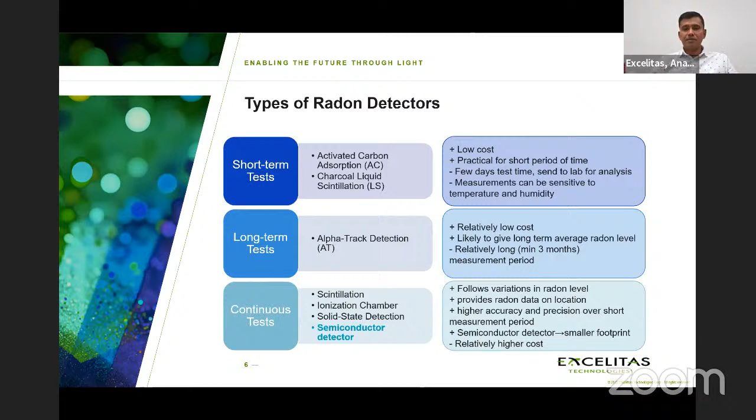The main importance is that continuous monitoring gives you information right then and there, so you know the trend over time and can take appropriate action. This is where the semiconductor detector comes into play. There are many types of continuous detectors, but semiconductor detectors are much more practical and easier to use—basically a pin photodiode, which is what I'll be talking about today.

What are the key requirements for good radon detection at low radon concentration, since you want to measure at low radiation levels? Like I mentioned, these usually need a long measurement time and a larger detector area—whatever the detection method, you need a larger area to absorb the alpha particles and do the detection. Also, how the setup is done, the collection setup or channel volume, all influences the measurement.

These are the key parameters, and silicon photodiodes typically cover all of them nicely, particularly for long measurement time. A pin photodiode can be used for continuous measurement, so you're looking at the trend over time, giving a better indication of how it changes. Silicon pin diodes are suitable for radiation detection, especially alpha particles, because they can detect at the surface—important for radon detection—and they have good energy resolution and good absorption depth for greater absorption.

Continuous measurement and ease of use are key. You can just bias the detector, and with a simple amplification circuit, you can make a good, nice radon detector. It's also more compact and lower cost compared to other continuous measurement methods.

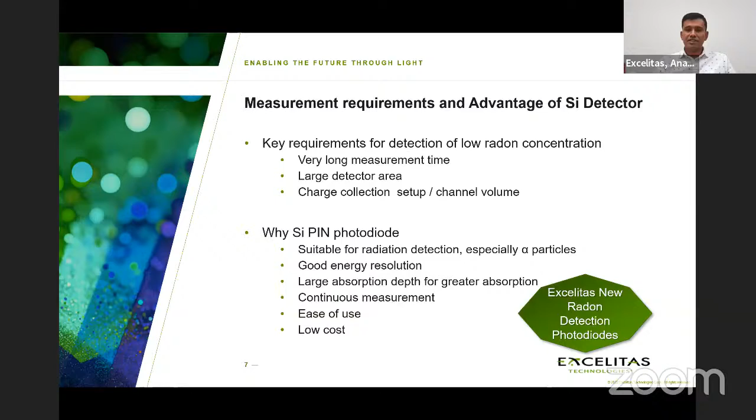With that, Excelitas is introducing a new series of photodetectors specifically suited for radon detection. The product is called the VTH21 series photodiodes. There are 2 different detector sizes we're launching now, 5x5 and 10x10, usually large enough for alpha particle detection for radon.

This can detect alpha particles directly—these are bare die photodiodes, not enclosed in any housing. That's what you need, because you want the alpha particles to hit directly on the surface of the silicon, which converts it into a signal that's then processed.

A large area, as I mentioned, is good—it increases the detection probability, with a wide operating voltage range. You can bias them at a higher voltage to reduce the capacitance, meaning you can detect much faster, and it also has a lower dark current.

These are unsealed detectors, so you need the design to be highly reliable even when operating in an unsealed environment. This has been designed with that in mind.

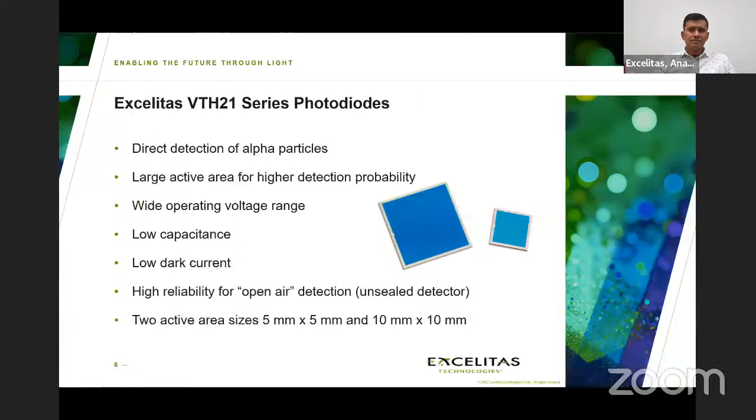We are excited to launch this product and hope it will serve a lot of homes to detect radon and provide early detection to improve everybody's life in the end.

Thank you very much, Anand. This is very exciting to see this kind of product. I was wondering, how compact can it be together with the packaging and the battery and everything? Can it become a wearable device?

It cannot become a wearable device because you need a kind of chamber. These are usually like a smoke detector that you would mount in a house. Typically they're mounted in the basement of the house because that's where the main source is, so that's where you want to detect. That's the typical assembly and mounting location for the device.

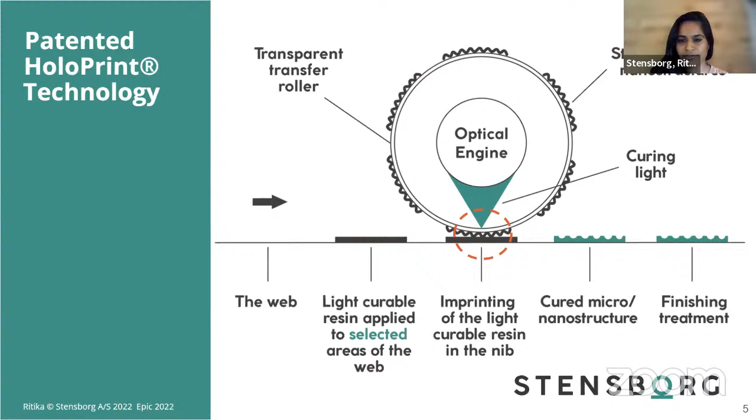So what's new with this machine in 2022? Well, the machine has been enhanced and improved with different things. First of all, the optical engine — the optimized UV light source — has even better optics now. Then there's better compensation for different substrate thicknesses. We've improved the design for several mechanical parts, and the plate motion has been upgraded so that we can do really low-speed operations.

And what does this all mean? The machine has become even more versatile — when you have really low-speed operations, you can cure even really hard resins. So these are some of the highlights of the machine.

And what can the machine do? Here are some things we've done with the machine. You can see a really complicated four-level DOE beam splitter that has been replicated with high accuracy using our machine. There's also this hydrophobic surface, which is a microstructure — a big structure with holes in different materials. And we can also do really high aspect ratio patterning with this machine.

So the machine is multifunctional. It can be used for nanoimprint lithography on hard and flexible substrates. It could be used for fabrication of templates, and it can also do processes like reverse nanoimprint lithography. With this multifunctionality, the applications span a really broad spectrum.

From photonics and optics to even life sciences — you can imagine you can imprint on the substrate, and that substrate becomes the device, for example for a DOE. Or you can imprint the surface of the substrate, making it a functional substrate, which you can then use as an etching mask or something like that.

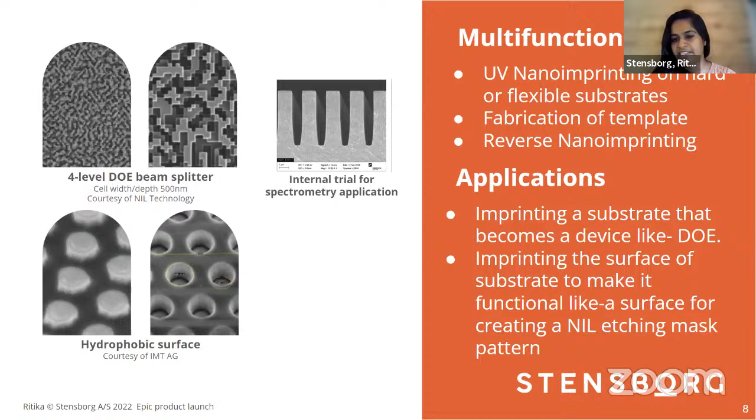So that was it from my side, and thanks for listening.

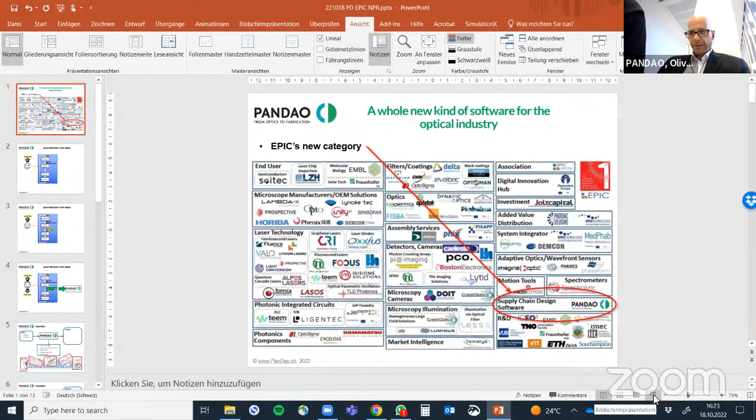Please, Okay Oliver, can you see my screen? Yes. Just make it full screen. Hello? Yeah, just make it full screen. Yeah, sure, okay.

I'm Oliver Faehnle from a company called PanDao, and my last name is quite complicated, sorry for that. We are a software company and part of Epic, and Epic generated for us, when we became a member, a whole new category: supply chain design software. So I will explain what this is, and then very shortly explain our new product, which we will release next week.

We all deal with optics. Optics needs to be designed, optical systems, to serve a certain application. While you design optics, you need an optics designer, like this guy here. And he is very nicely helped by optical design software tools like Zemax, Code V, OSLO, and so on, to design the optical system needed for the application.

But the next step in the generation of the optical system is the fabrication. And this interface from design to fabrication is exactly where PanDao moves in, because today this is still based on human-to-human interactions. You need to talk to each other and ask, can you fabricate this design? How much will it cost? How big is the danger, or how low is the risk? And that's where we move in.

We developed, that's our standard product, a software tool that reads the optics design and simulates an optimized fabrication chain. It helps you to know the cost of your optics when it will be produced and the risk you have if you want to have it produced. So basically it makes the optics designer more happy.

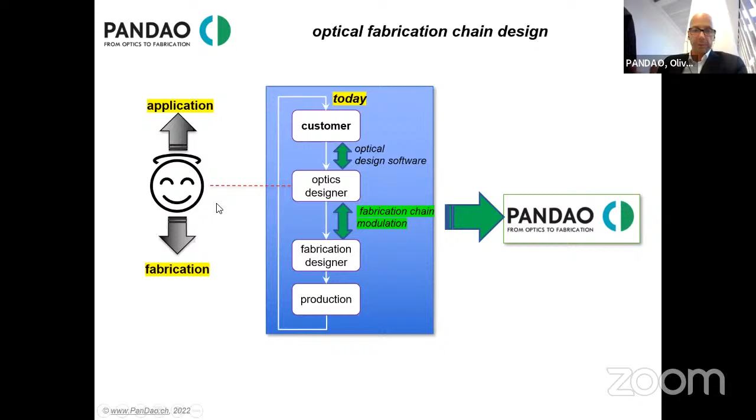How do we do this? We read in, due to ISO standard 10110, optical drawings, and we need to know how many lenses you want to produce. Then PanDao harvests among 360 different technologies available to produce optics, ranging from diamond turning to ion beam figuring to magnetorheological finishing and so on, all 360 possible techniques, and makes them compete with each other to be allowed into the best fabrication chain for this piece of optic.

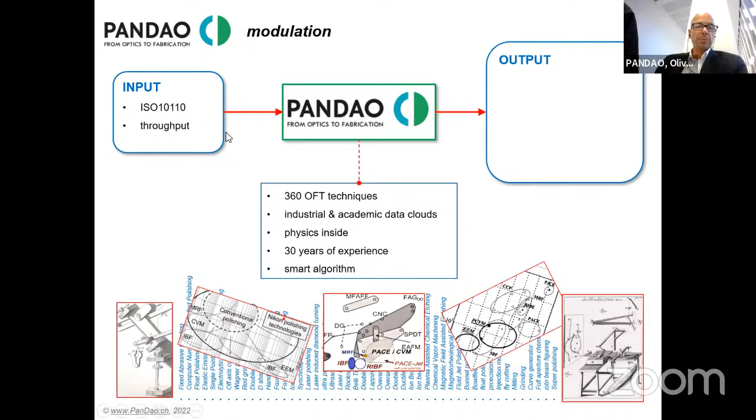So the output of PanDao software, that's our standard, is the most cost-efficient fabrication chain. On top of that, we also give the fastest fabrication chain, because sometimes you have to deliver next week, and then you are happy that you can deliver, although it might be a little bit more expensive. What can you do with that? Well, here is a lens that you read in. It's an asphere made of glass, and it's just a short glimpse so you know what I'm talking about.

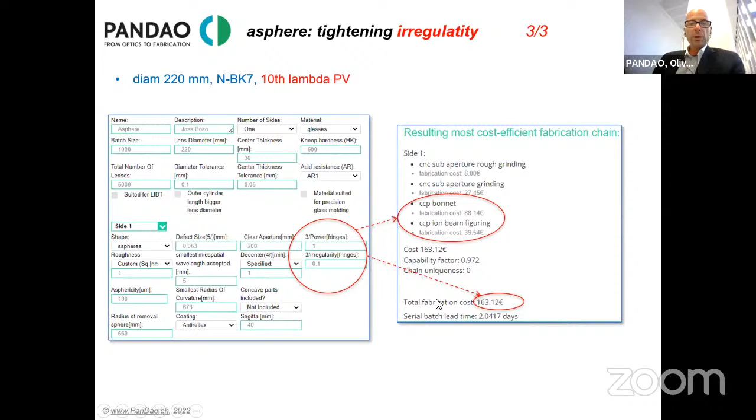If you now change the shape accuracy during design, you can check what the impact is on fabrication. Like you go from 2 lambda to 5th lambda, and then you see different technologies move in and the price changes as well. Or you go to a 10th lambda, then again technologies change and the price changes again. This is what you can do with PanDao, and this is the standard we harvest among these technologies, and we give you the best fabrication chain.

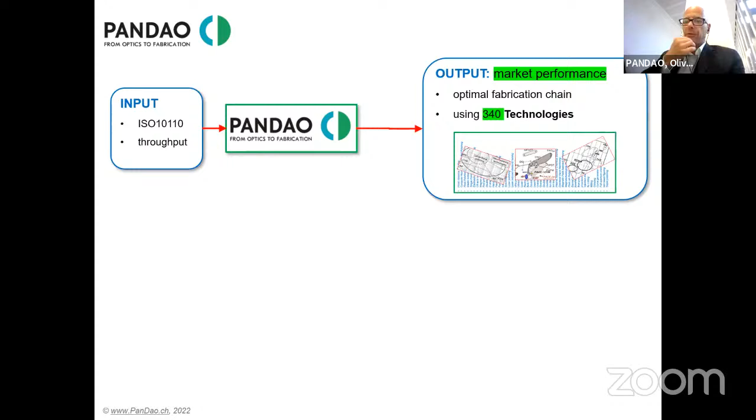So what is our new product, which we will release after this meeting? This is another kind of software, PanDao, and this reads in, NDA protected, the fabrication technologies you have. If you are a fabrication company, optics fabrication company, you don't have those 340 different technologies available. You have some of these.

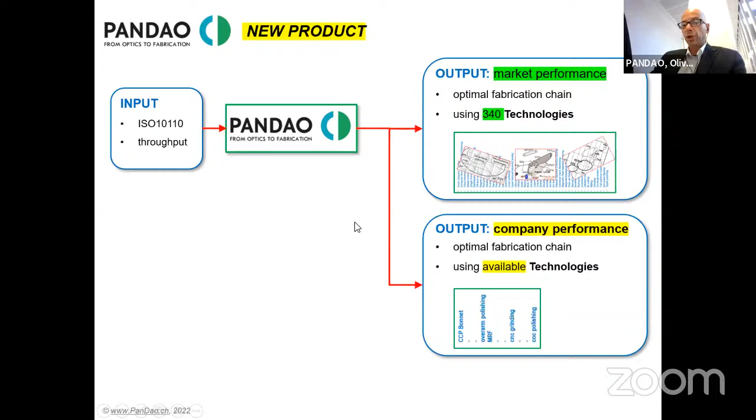Of course you are interested in having the best results possible on the market, but first of all your CEO is interested whether you can do it with your own technologies available. So we read in your technologies, which are of course not the amount available out in the market, and then you get the best fabrication chain based on your own available fabrication technologies, and can compare that with the best fabrication chain if you would change and go to a supplier, or if you invest in something.

So what is your gain? Your gain is you can determine the delta of your best fabrication chain for this optics to the best fabrication chain available in the market. So either you can prove, hey, we are better than the market, or you see we are more expensive, so let's invest in a new technology to stay competitive.

The second thing is you can evaluate your own or your supplier's fabrication chain. You ask your supplier, okay, you want to produce our optics, so what do you have available? And then they tell you what kind of technologies they have. Then you check what this will be costing if they do your optics, and you can compare that again with the market available. So this helps to save risk and money.

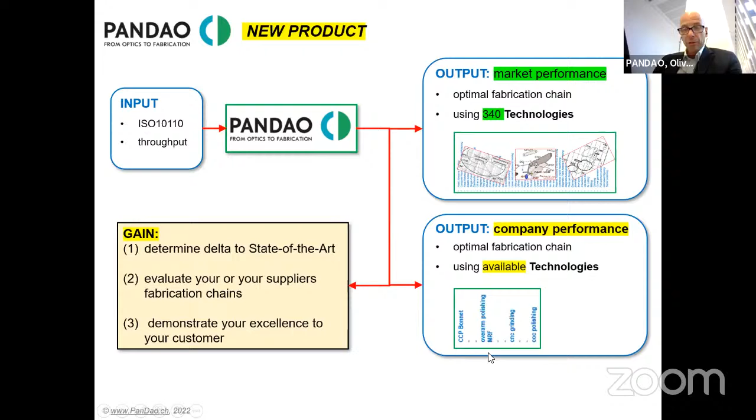And the last one is, of course, if you have a fabrication booth, you're really good, and then you can prove to your own company or to your customers your excellence. You can show that your own fabrication chain is optimized for your product. So look, you don't need to check for other suppliers, you already found the best one. So that is our new product. We call that the company performance software addition to our standard PanDao software solution.

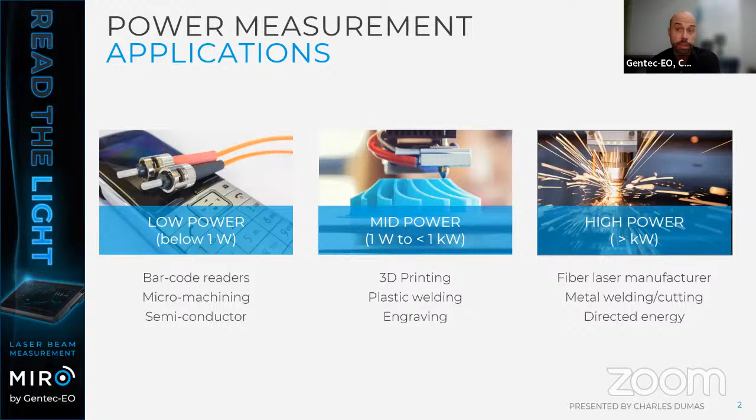I just want to cover what the Miro is and its application first. The application is basically that you want to measure the output power of your laser, which could be from low power to mid power to higher power. The Miro Altitude is the display that will work across that whole range, and it's the main choice you can have for this. The same applies for energy measurement, from low energy applications like LIDAR, telecom, spectroscopy, to medical applications, material processing, or high energy applications like nuclear fusion, physics, IPL, and more. This display will work with all detector heads that measure the output of your laser.

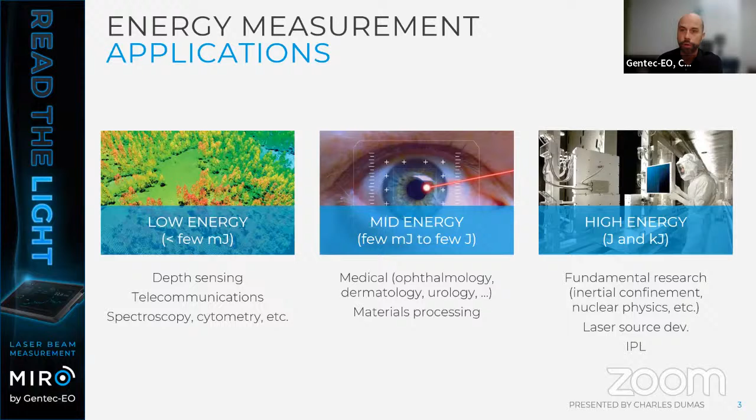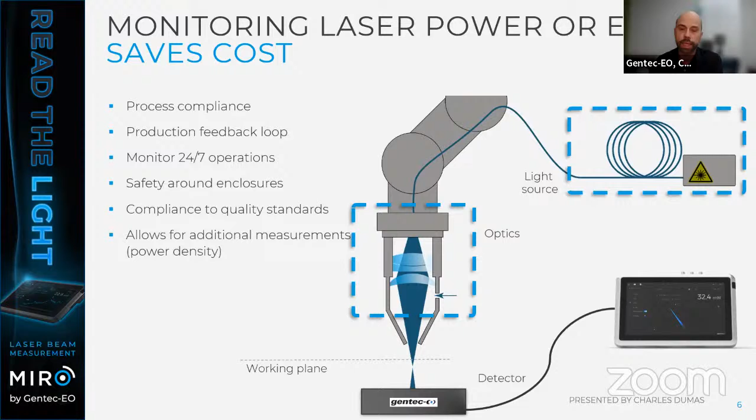What we want to give you is the easiest to use interface, for the most hassle-free experience possible. Because what you want to know is the output of your laser system, and you don't want any kind of trouble between the test measurement and the accurate measurement.

So here it is, the new Miro Altitude. It gives you 3 display modes: scope chart, needle chart, bar chart, direct access to all the parameters, and the possibility to get full statistics and reports. Inside, it has a powerful software running on a modern quad-core processor, with lots of space and memory to save the data.

The trend right now is to go with a bigger screen. In cars, the screen is getting bigger; in high-end phones, it's bigger too. The same logic applies with the Miro Altitude. Everything is encased in a very strong aluminum machined body, and you can feel it when you hold it. It's the kind of item that if you do a drop test, it will break the floor, not the device itself. It's slim, with a very high resolution multi-touch screen that is also anti-glare and anti-fingerprint glass, making it ready to use in a lab with safety goggles on.

It is able to read all the detectors from Gentec-EO that have a smart connector DB15. You can read our whole family of power meters, photodiodes, low power detectors, and energy meters. Basically all the detectors that can connect to the Miro.

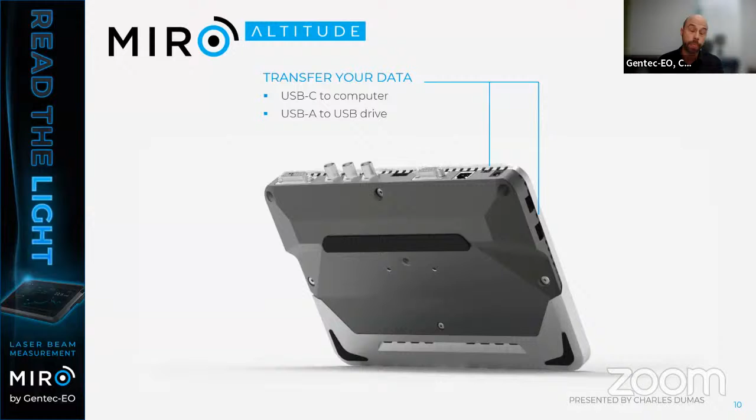We didn't spare any expenses on the battery size. We put a big one that gives you the possibility to run the test for 6 hours at full brightness.

It also comes with different ways that you can recharge it. It's compatible with USB-C or a barrel jack, and of course we provide a power supply with it, but you don't have to always use the one that comes with it. You can share it with different colleagues, and they can use their own power supply to recharge it if required.

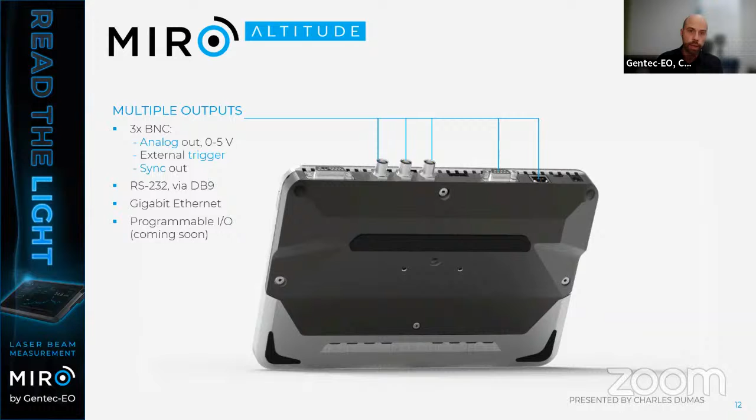Different outputs are available: three BNC, analog output if you want to work with a different one, RS232 with a real DB9 connector, and gigabit Ethernet is available. Programmable I/O will be available for logic system programmable alarms if you want to automate your system. It has wireless capability under the hood, not available at this time, but it will come at some point when things are ready.

What we wanted to show here is basically it's got the most intuitive user interface. You don't want to read the user manual, and nobody wants to open that kind of document, but you're not going to need it, everything is there up front.

There's a navigation bar where you can take screenshots and do acquisitions from the top. On the measurement settings panel at the left, you'll see all the parameters you're able to select, without needing to go into a deeper menu to change any of them. On the right, you'll see a scope that is very quick, and you can adjust it after with your touch screen.

Other measurement modes are available, such as a needle display that you can use for optical alignment, and they're very quick, much faster than a physical one, since they don't have to scale up or change when they jump between different ranges.

On playback, you can reopen a file that's been acquired earlier and it will replay the same file. You'll see statistics available from the center of the screen, like minimum energy or power, average power, what you did measure, and you can rename the file. So there are a lot of things you can do for reporting, for service, for burn-in tests, things like that.

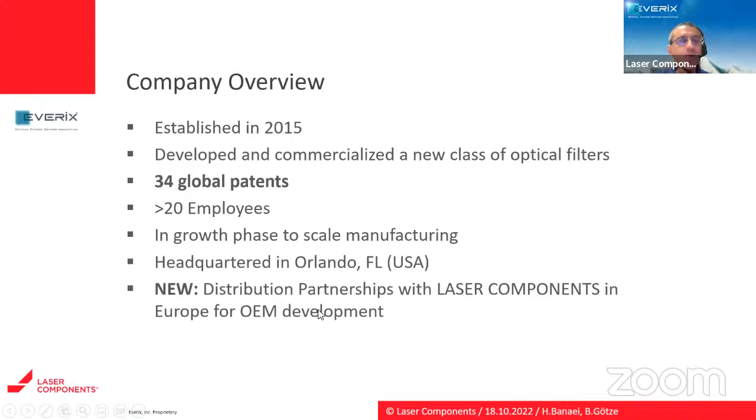Just a little bit about us as a company. We're a relatively young company, started in 2015 after a few years of R&D and development. We've now been offering our new form of optical filters for a few years, and we've developed some 34 patents around our core processes, products, equipment, and everything around this new class of optical filters. We're now in our growth phase, getting ISO certified and starting our journey into volume business, while to this point we've been primarily for small and medium-sized business. We're very excited that we've recently started a partnership with Laser Components as our OEM, development, and distribution partners in Europe. So with that, let's talk about the technology.

We're all familiar with vacuum coating and how traditional optical filters are made, and this is how the products look. So what we are adding here to the industry, as a complementary solution, is a new way of making optical filters, because there are many segments of the market that require a different level of scalability and economies of scale, allowing these high performance optical filters to get into much larger mass markets.

And that's where our thermal drawing process comes in, a process that is more similar to how optical fibers have been made. In fibers, you start with a large cylindrical preform, you draw it down to fibers. In our technology, we start with a multi-layer slab at a really large scale, and then we shrink that entire stack.

We pull the entire stack of layers down to the nanoscale sub-wavelength regime. As a result of that process, we offer really good scalability, and the product comes out at least some 20 times thinner than traditional optical filters as a standalone component. This helps a lot of our customers increase signal to noise ratio in their sensors, for example. In many cases, our customers want to miniaturize the device - let's say if it's a wearable device, you absolutely want everything to be very compact and lightweight.

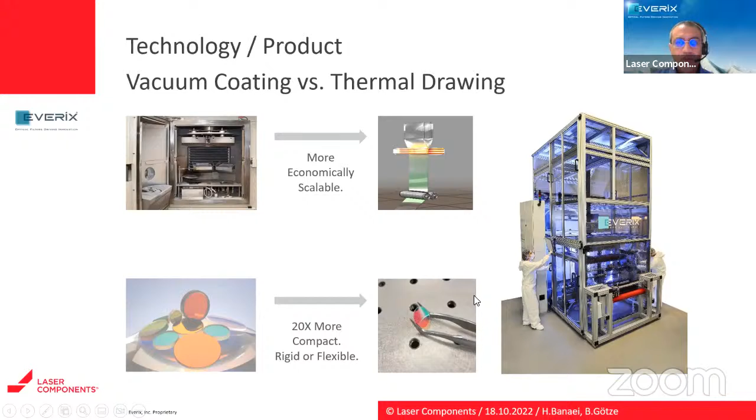In terms of filter specs, these are the type of specs that we get. As you can see, we can have very narrow and very sharp notch filters up to optical density 6 for notch and multi-notch filters. For long pass and short pass filters, we can go up to OD4. And we've recently launched our bandpass filters, again up to OD4. We can operate within the entire visible and shortwave infrared range.

The current materials that we're using are acrylic based, so the temperature range is a little bit limited to applications where you don't have extreme temperature conditions. However, we have higher temperature solutions that are in R&D, and hopefully we'll be introducing them in the years to come.

Now, in terms of the technical differentiations of the product itself, there are multiple things you can consider. One is that because the material can be made flexible - it can be rigid too, but if someone wants it flexible, we can make it flexible. We can make it thin enough so it flexes without cracking. Because of that, we can imagine scenarios where angular shift of a filter can be compensated just by simply curving the filter, and that can save some space in the optical train too, in the optical design.

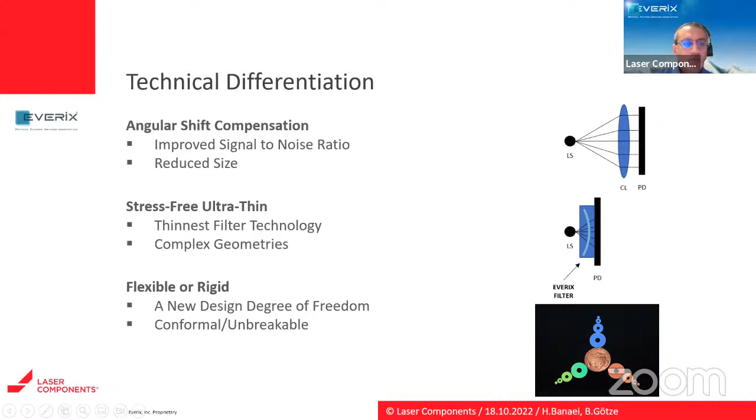Most of the applications that we're currently targeting, and where we see more success in the market, are either in the medical or technology wearable domain - wearable devices, portable devices, anything that requires lightweight, compactness, and miniaturization - and also in the LiDAR industry. Again, both from a scalability standpoint and the fact that we can flex these filters and place them on a curved surface to reduce angular sensitivity.

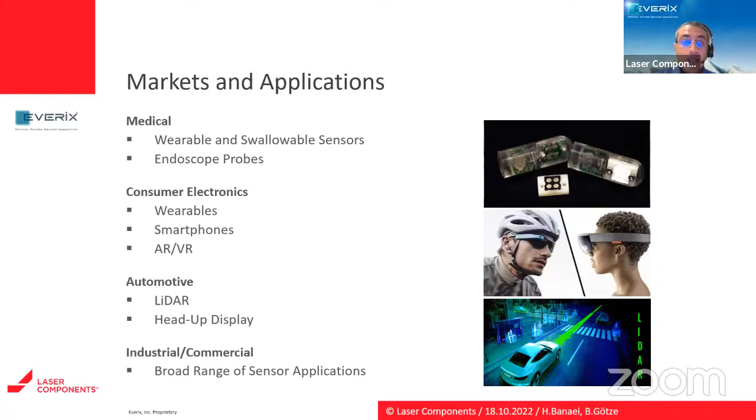And with that, I'll just conclude that if you have any questions for customers in the European market, you can contact our colleagues at Laser Components, and we'll be jointly supporting your needs. Thank you so much for your attention. I'll be happy to take some questions.